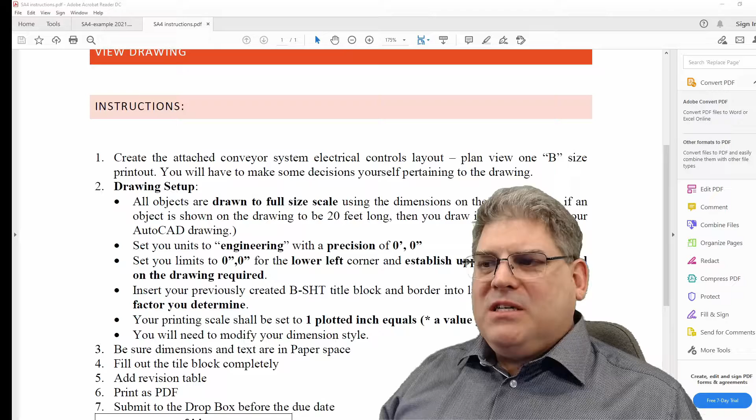In case you haven't figured it out, we do have a system with several motors and some contacts in it. So what I'm asking you to do is create a drawing, and this drawing has to be a 1-to-1 scale. There are a couple of things we want to do.

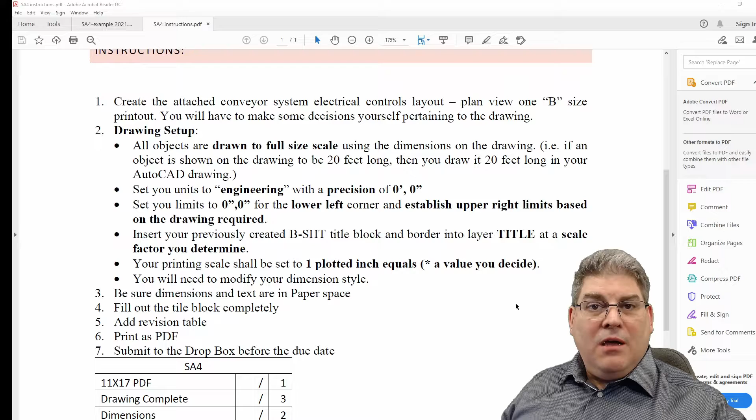One is we're dealing with an imperial system here. A lot of the shop mechanics and tradespeople still like working in feet and inches, so I want you to follow the drawing setup as described in the instructions, which will give us a feet and inches sort of measurement. I also want this drawing in as an 11 by 17 — the reason being an 8.5 by 11 is just way too small.

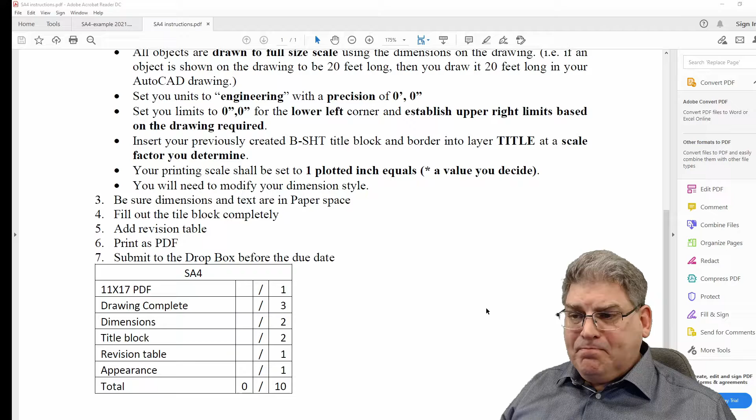Looking at the marking scheme here, it's pretty simple. Is it 11 by 17? Is your drawing complete? Do you have sufficient dimensions on there? Do you have a title block and a revision? And how's the appearance? So again, fairly straightforward for the marking.

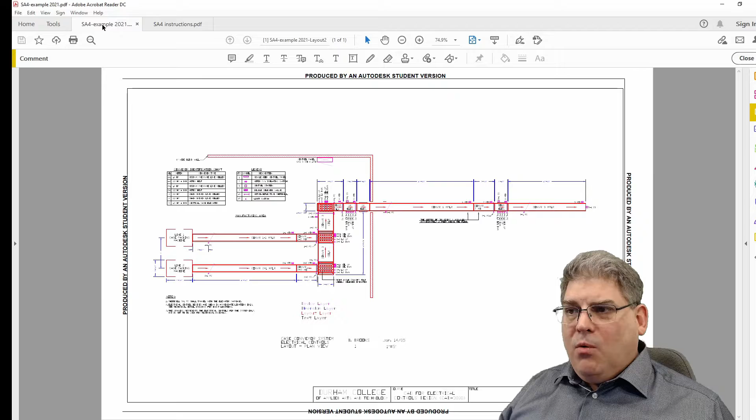You shouldn't ever be surprised by my marking. Okay, so what are we drawing? We're drawing this — and it looks fairly simple, but as we zoom in, you'll notice there's a fair bit involved in the labeling.

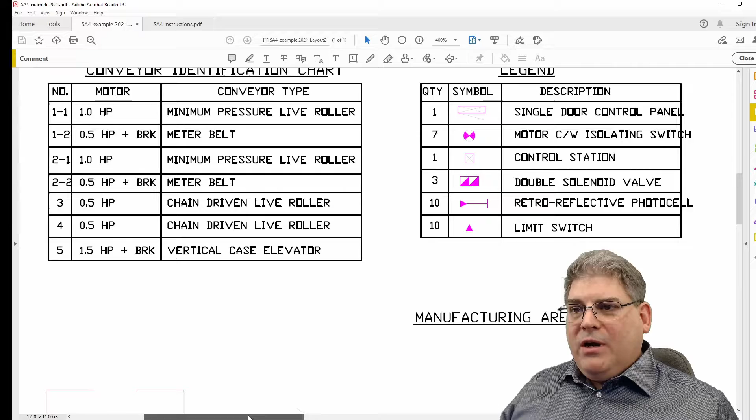This is actually something you are going to see in industry, where we mark out exactly what each of these motors are. We do have our legend in here for especially non-standard things.

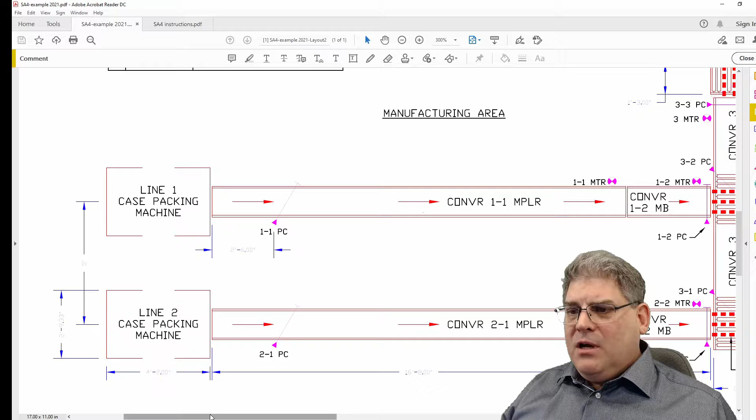And we have this conveyor system. The idea is that we have two packing lines that come across to a common conveyor belt, then to a lift elevator, and finally out from the packing area into, I assume, the shipping and receiving area. All of the dimensions are here.

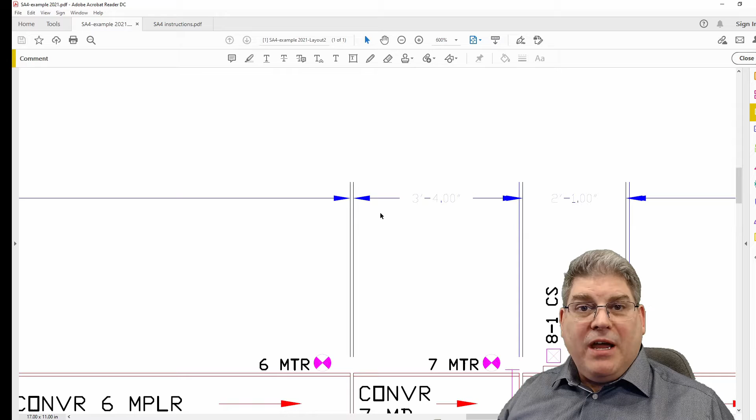The drawing should look better than it does on my screen right now, but if there are any problems or questions, feel free to ask. Do understand that there's a certain level of flexibility to this. If there aren't dimensions to something and you really want to know what they are, or you know we could modify it slightly, feel free to do so. It's more about the exercise of creating the drawing than about the absolute accuracy of replicating what I have drawn here.

All right, so everything's in the content folder. Feel free to peruse it at your leisure. And this is, I believe, a 2-week assignment.